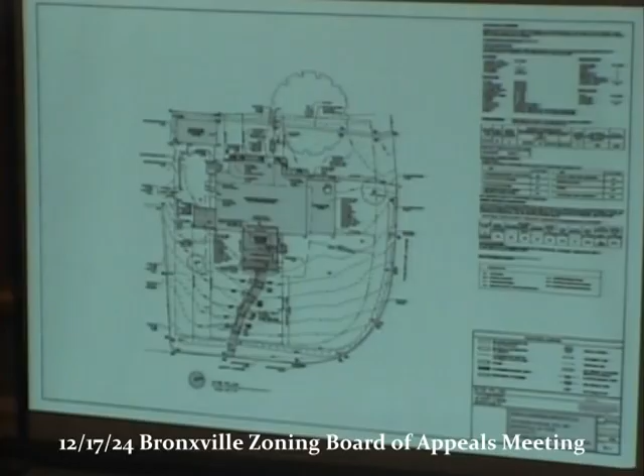Our project also proposes the existing open covered porch at the north side yard to be enclosed and finished as a new office space. The roof of this existing portion of the structure, along with the roof over the existing one-story sunroom at the south side, are to receive new EPDM material roofing and decorative railings, proposed improvements that would increase existing non-conforming conditions as these portions of the building are within side yard setbacks. The owners seek a variance for these improvements.

Additional work includes replacing the existing stucco finish at the sunroom exterior with new clapboard siding to match existing, the alteration of the existing back entry to include a new door and window, and new living room windows towards the rear yard.

We also propose new planting beds alongside the exterior at the rear of the property and the repaving of the existing asphalt driveway. The owners have hired Hudson Engineering to assist with a stormwater plan to address the proposed improvements.

I request that the board, in making their determination, consider the benefits to the owners as weighed against the detriment to the health, safety, and welfare of the neighborhood and community if variances are granted. As to the requested variances, we respectfully submit the following.

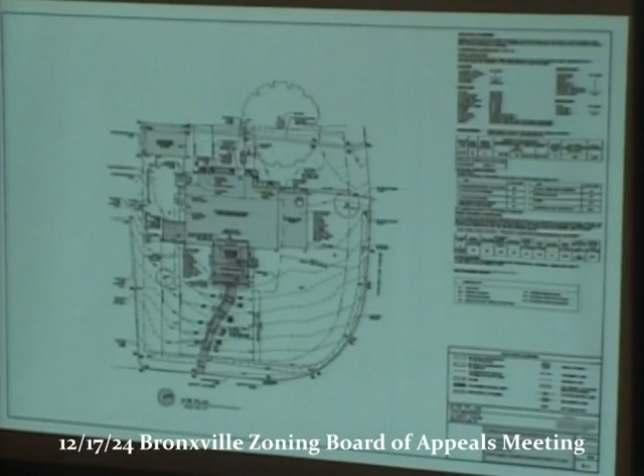These are the new railings we're proposing on the side, the enclosure of this porch, the railings over here as well, and then the use of clapboard as a finished material on either end to tie it in. And then our addition proposed here, also unifying with a railing and still trying to stay within the scale of this home, which has this characteristic gambrel style roof, giving it an unobtrusive presence.

The addition is designed well within the front yard setback, maintaining a comfortable relationship between pedestrians and the building along the streetscape.

Second, the benefits sought by the applicant cannot be achieved by any feasible method other than the requested area variance. If we could go back to the floor plan of the first floor.

Unfortunately, the first floor plan does not lend itself to a straightforward interior alteration that would allow for a powder room and coat closet to provide an alternative to variances.

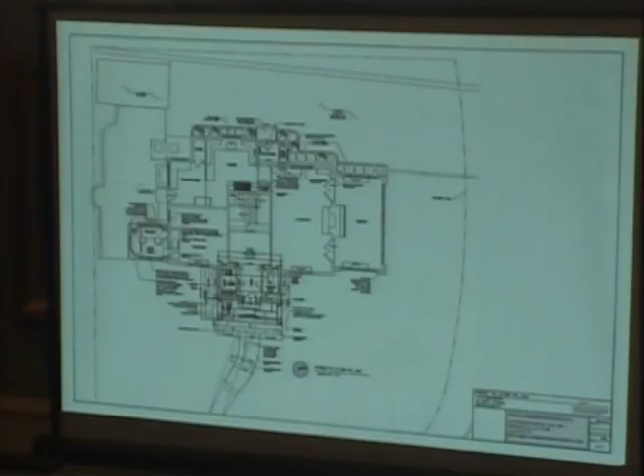Similarly, the existing covered open porch offered the only existing first floor space, which is this here, that could provide dedicated office use that did not involve expanding the building footprint or take away from valuable family spaces such as the living room and sunroom, which are here and here.

In addition, the proposed re-roofing and decorative railing side yard improvements look to enhance and unify the home's appearance, tying two wings into the body of the primary structure's architecture.

The intent to improve the appearance of the north and south one-story structures, here and here, requires us to request a variance to work on the existing building areas due to the setbacks and non-conforming position of the structure on the property.

Third, the requested variance is not substantial. The proposed area variances are not substantial in that the proposed improvements only increase the existing non-conforming building coverage a total of 213 square feet, or 2.3% over the existing.

The relative decrease in open space is 1.1% from the existing. Of the 213 square foot net increase in building coverage,

205.1 square feet is new one-story building. So this is the space of the columns and the closet and the powder room in the hall, with only 125.5 square feet of that area being new conditioned interior space. So just saying, we're only having 125 square feet of actual solid volume.

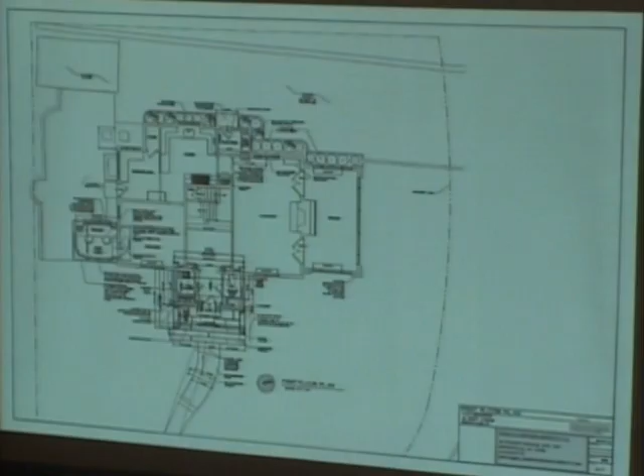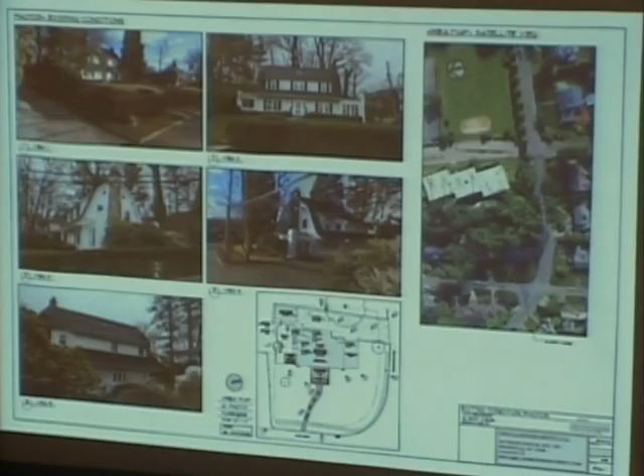How many people did you notify? So we notified -- there was no list.

Usually there's a list. There is a list. There is? I didn't see it. Okay, oh you got it? Yeah, we didn't? Got it, yeah, wow. Yeah, there's all the things. Christina, two, three, four, five, six. Okay, that's fine. You know what it is? It's in the back of this packet. It might be in yours and you didn't see it, so. Right, yeah, of course, okay.

Do you have to notify? So I think there were -- but they don't, okay. And we originally sent one out to Concordia because that was on the listing, and then we did send another one out to the correct address.

Yeah, okay. For some reason I didn't see it or didn't get it. They informed us that they -- some of the different names.

Quick two questions. Number one, what you're adding -- you're only increasing your square footage by 200 square feet, is that correct? Because, and I understand for zoning purposes there's a different category for this porch that's being enclosed, but that's there already and you're just putting walls and windows on it, right? And then the one on the other side, it sounds like you're just putting a window on it, or that.

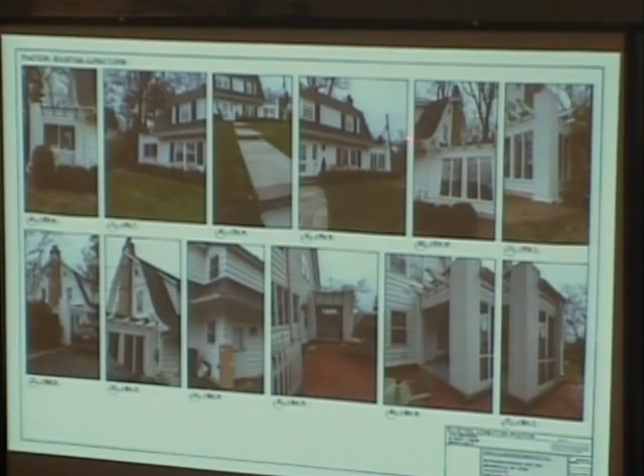Wood siding, so currently you can see in these two views. We want to match the existing central body of the house, which is this clapboard, and we're looking to match these louvered shutters. There's a company we'd be working with, Timberlane. Even down to the little evergreen cutout detail, those are all things we want to carry through to the two sides.

I'm just thinking, wood, and you mentioned gutters - are they using copper, or some other material? For the gutters, we would match the existing, which are aluminum white type K. The intent would be to tie in and match. That's not relevant to the variance, it's just aesthetic.

Do you currently get water, flooding, like most of us? Yeah, certainly, when it rains, because of the slope that we're on. It races down. We were on Summit for years, and yeah, we got water.

Honestly, from my perspective as someone who worries a lot, it's one of the most exciting aspects of this project, because the Hudson engineering aspect here will protect the property, which means a lot. And Summit is downhill - we're about halfway across, relying on the hill.

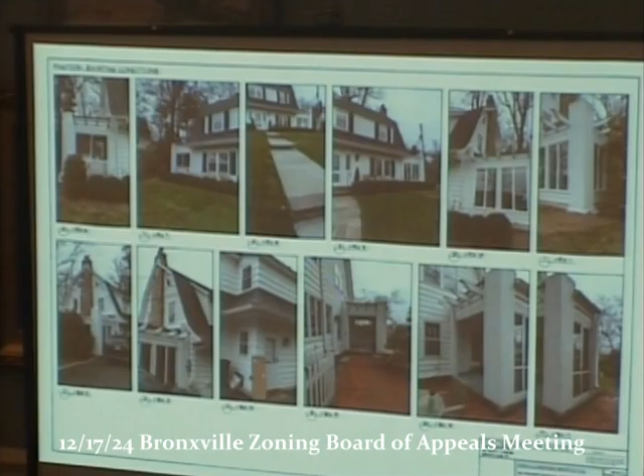Okay, so the current house facade is flush, and you're putting on this foyer and porch. It looks like it's 16 feet wide, coming out 12 and a half, 13 feet - so it's quite a large addition, maybe not from a square footage standpoint. I'm interested, since you're putting in a railing and there's a roof line there - from an aesthetic standpoint, talk a little bit about that. Sure, well part of the design - maybe we could go back to the exterior elevation view.

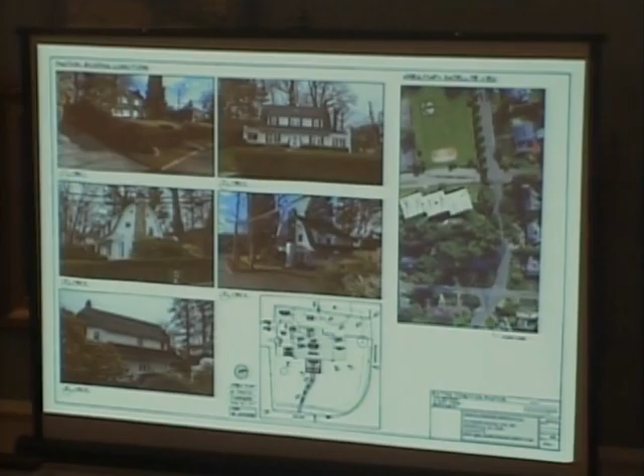Maybe one towards, yes, this one. So in the design of this structure, we're looking to really break down and have some formality with it, of this volume with the columns in the front, providing the benefit of having an area where in the rain you could get out your keys with your groceries, but also coming out of that whole portion, only 7 feet is solid, and we'll still have this space below that provides a sense of, hopefully, lightness in the front.

And then the scale of this railing isn't a true 36-inch high railing that you'd have if you had to provide a railing for life safety code reasons. It's strictly decorative. I think I might have a dimension on it, I just can't read it, but the intention is to make the addition attractive and appealing, but also be considerate to the scale.

You won't be accessing either of those flat roofs? No, they're decorative, all 3 of them. So we're 6 inches lower than what you would have with a standard railing, whereby you need actual fall protection.

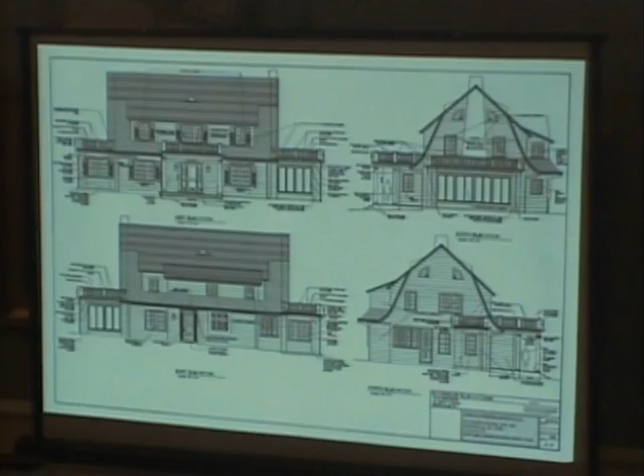And do you have to cut into the roof line behind that or not? Yeah, so if you go forward one more, actually the other direction, I'm sorry. You see this roof plan? Here's my gutter line. This EPDM roof is tied and flashed into this line here, and our gutter line is just slightly higher coming around. And then our railings also will tie in, so you really don't see, you don't have something like that you would ever see, especially down from Summit or Tanglewylde, looking up.

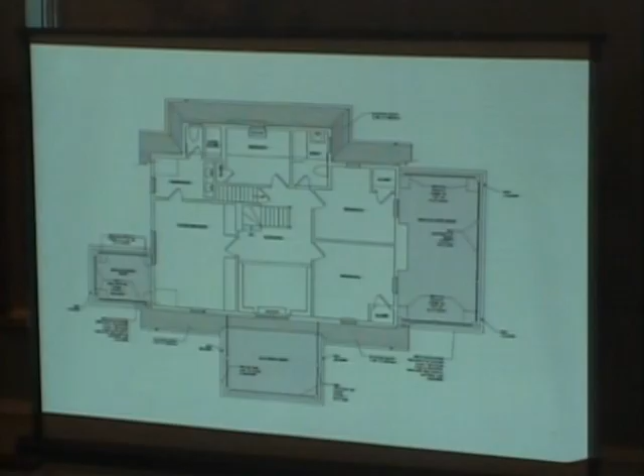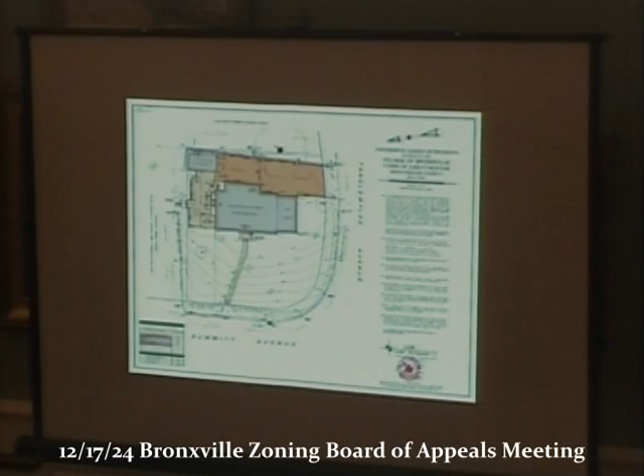Okay. And landscaping, any plans on landscaping or re-landscaping the front? Yes. Landscaping is probably something that the owners could speak to, but that's a very important aspect of the project, and they're very anxious to address that and beautify the home. I think we're really lucky that we do have such a large front yard, and maintaining a nice look up there is important to us. We plan on engaging our existing landscaping company to help build a plan to maintain that. We work with Felix Panzarella, and he now has a landscape architect on staff, so they were going to work with us to make a design specifically for this.

Jane, you have anything? No, I'm good. I don't have any more questions. Rick? Okay, well, I don't see anyone from the public to ask. Okay, well then.

Let's see here. Okay, let me propose a resolution that the Zoning Board of Appeals grant to the residents of 46 Summit Avenue the following variances. Number one, Section 310-10D2. Two side yard setback variances are required. Improvements proposed to the existing one-story sunroom on the south side and to the existing open porch on the north side of the residence. Such improvements increase an existing non-conforming condition.